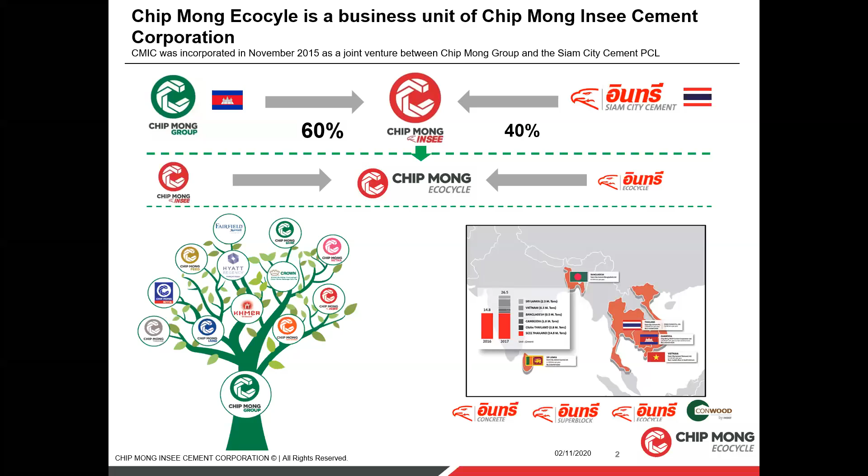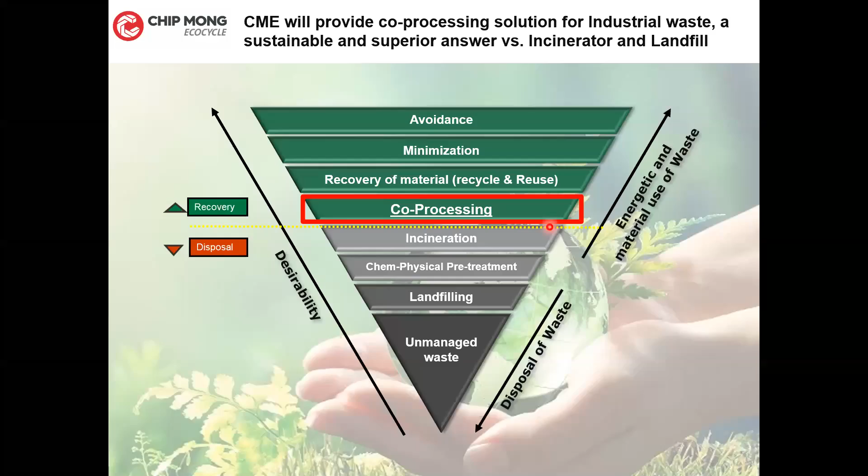Co-processing basically means we are doing two activities simultaneously without compromising either one. That means we are producing clinker, which is the semi-finished good of cement, and at the same time we are disposing of waste in parallel. That is called co-processing.

So the cement kiln is one of the perfect infrastructures to dispose of waste, even the most hazardous waste. Why? There are two main features of the cement kiln: one is temperature, the other is residence time.

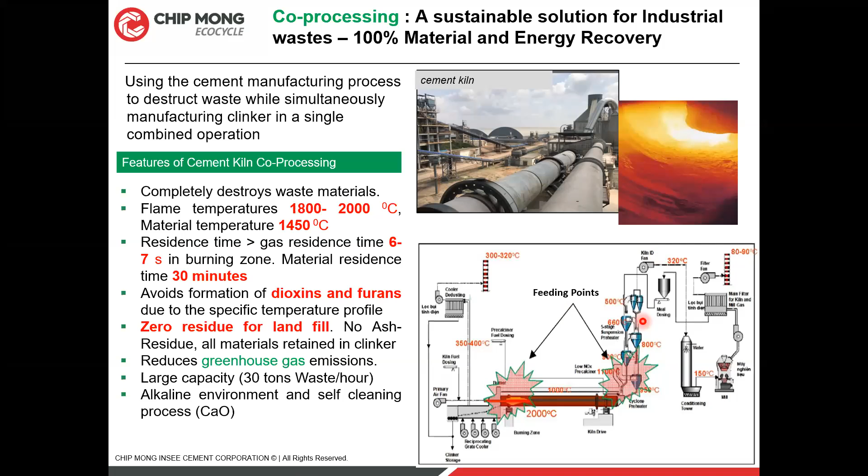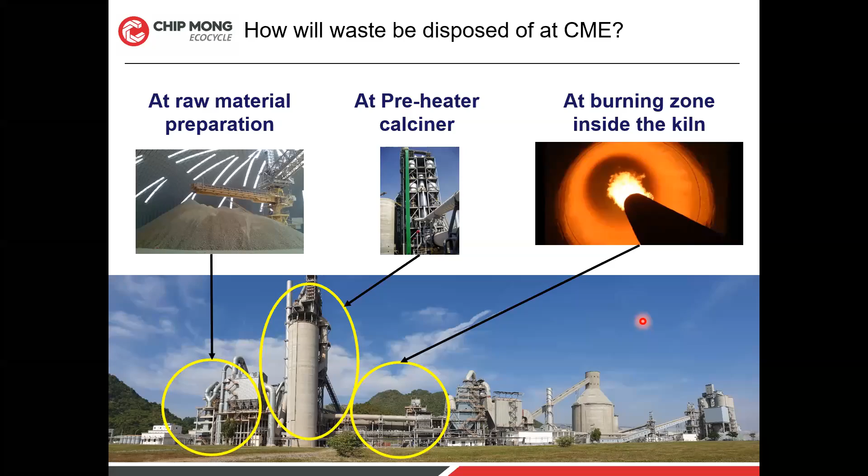At the same time, cement manufacturing process also should be there, because for our day-to-day life, cement is a necessary product. Therefore cement manufacturing also should continue. Apart from water, the second largest consumed material is concrete, in the world. So cement has to be there. And in the cement manufacturing process, there are also emissions going. So finally, cement will come.

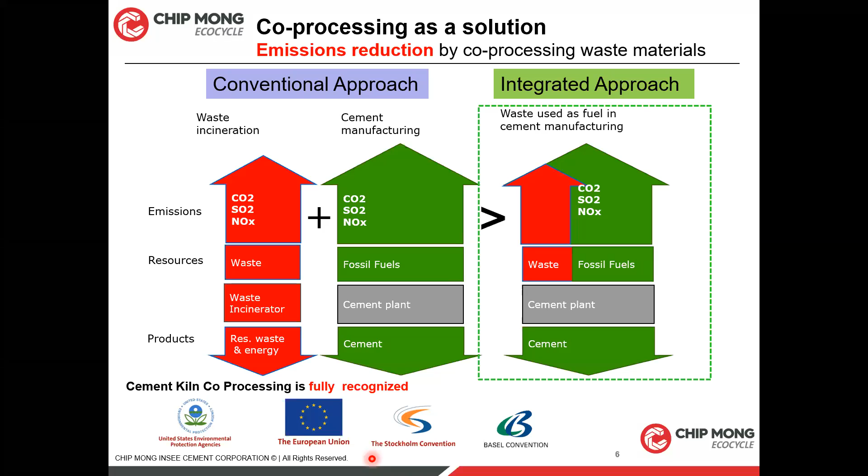So if you look at what waste we can co-process - at the moment we have capacity of 75,000 tons, which we are going to increase further in coming years to double these volumes. From non-hazardous waste to highly hazardous waste like PCB waste, we can dispose of it. That means if you give us industrial waste, 90% of it we can dispose through our solution.

Now let me explain - I remember in October 2019, Cambodia had their second waste summit where I presented our solution. At that time it was under construction. Then in December 2019, we implemented our solution, and within 10 months of operation, we accomplished a lot of things.

One thing is we started with biomass and things, and then within 1 month we started to give solutions for non-hazardous waste like garment waste. In Cambodia, 70% of industries are garment and footwear industry, so we started to dispose of garment and footwear waste.

At the same time, there was one of the main issues in Cambodia - basically there was no facility for the secured disposal of branded waste, like branded FMCG products, branded shoes, branded garments and things, which we are now giving the solution for.

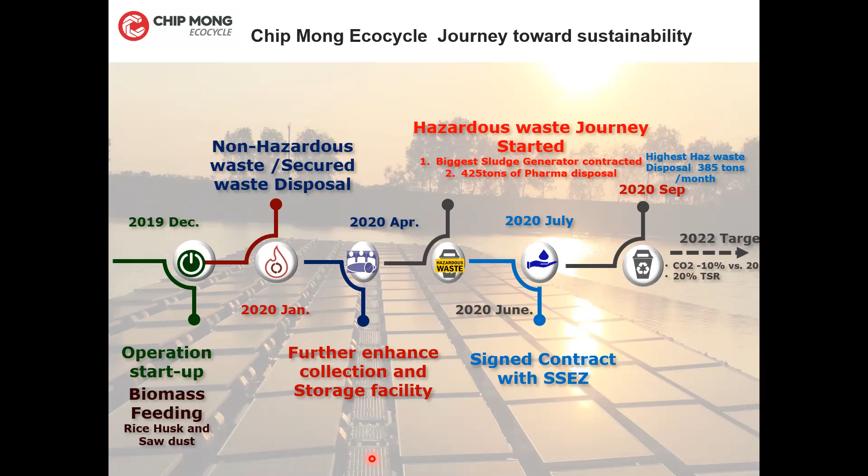As a result, we now have more than 30 factories working with us. We were able to replace fossil fuel by 10%, and 30,000 tons of waste have been disposed. At the same time, we have reduced 36,000 tons of carbon dioxide. For this particular 1.5 year period, we have invested more than 5 million only for the waste management business, apart from the infrastructure in the cement plant.

So that is about our journey, and I think that's about the Ecocycle. Thank you very much to the Congress for giving us this opportunity to show this successful business case.

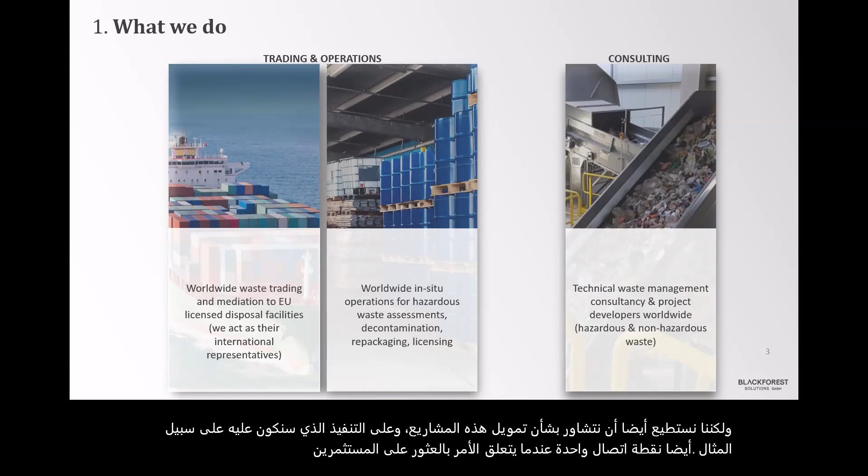And the second part is consulting, indeed, where we consult on a more technical level, technical waste management projects, but we also consult on financing these projects and on the implementation. We would be, for example, also one point of contact when it comes to finding investors, or when there are difficulties to implement concepts and strategies in countries.

When we talk about Germany, what is at the moment—this data is a little bit old, from 2014—but in Germany that has not changed too much. There's a bit of an increase of generation, but we speak roughly about 350 to 380 million tons of waste generated in Germany. Out of this 350 to 380 million tons, most of it, as you see, is the so-called C&D waste, which stands for construction and demolition waste. So only a rather small part is municipal waste, which you also know as household waste. We're talking about roughly 50 million tons.

In Germany we have rather high recycling. So the figures vary a bit, but we're speaking between 65 to 70% of recycling in Germany of household waste. The hazardous waste amounts to about 17 million tons in Germany.

And what we always like to say is, waste management in Germany is not just bringing or collecting waste in a bin and taking it with a compactor to a landfill, and that's it. It's a whole circular economy—I have to say industry, right? Because there are more than 270,000 people employed in waste management, in direct employment with waste management solutions. And the annual turnover in Germany for waste management companies is about 70 billion euros.

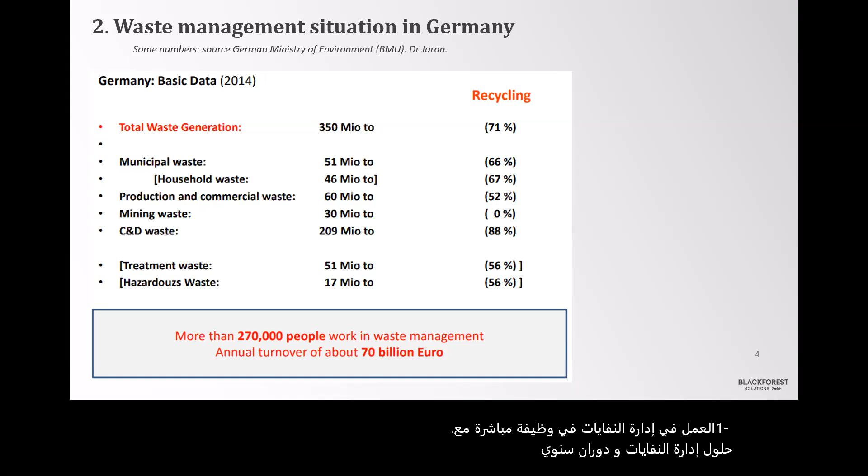When it comes to the different plants installed in Germany, we currently have 15,500 plants dedicated just to treatment. When it comes to waste to energy, it's worth highlighting that there are 161 classical waste incineration plants.

We have 687 waste-to-energy plants. When you look at the acronym MBT here, that stands for mechanical biological treatment, we have 55 plants. This is also related to Sajith's presentation before. In this MBT, so-called refuse-derived fuel is generated, which the cement industry can take, can buy in some cases, and use as an alternative to their primary fuel. Most cement kilns use fossil fuel as their main energy source, but it's very important to substitute these fossil fuels with alternative fuels.

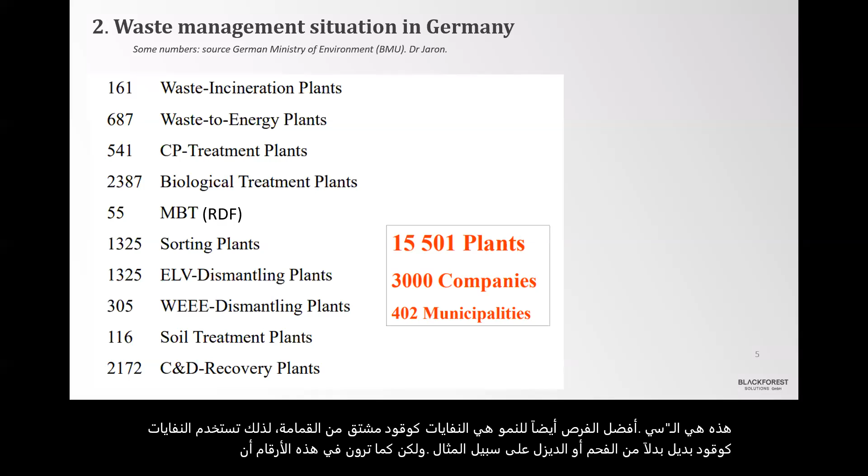And the one that has the best opportunities to grow is waste as a refuse-derived fuel—so waste used as an alternative fuel instead of, for example, coal or diesel. But you see also in these numbers that there's huge activity in Germany's circular economy and waste management.

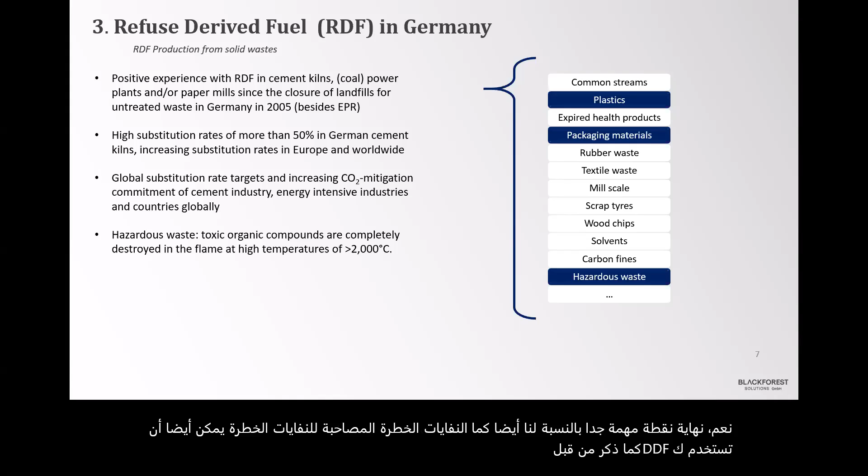And very important, hazardous waste can also be used as an RDF, as mentioned before by Sajith. So it's very pleasing to hear that now around 400 tons per month of hazardous waste is being treated in Cambodia in a cement kiln.

Why it's still challenging when we think about other waste to energy solutions: there are challenges when it comes to classical typical waste to energy facilities. One is that you always need a high calorific value of the waste. And if you just have a single bin with organic waste, like kitchen waste and food waste mixed in, then the calorific value decreases and makes it difficult to implement a waste to energy facility.

Normally you should have a small influence of the so-called informal sector, the waste pickers, but unfortunately or fortunately, depending on the perspective, in Southeast Asia you have a strong influence of the informal sector who is picking especially plastics and paper out of the waste. And this plastic is what normally contributes to the calorific value.

Also, when you operate waste to energy facilities, you need as an operator rather high so-called gate fees—this is the tipping fee that must be paid by the company that brings the waste to the facility. And also you have rather high capex, investment expenditures. Because of all these factors, especially waste to energy with grate firing—typical classical burning of waste—is rather difficult to implement for these reasons in some Asian regions.

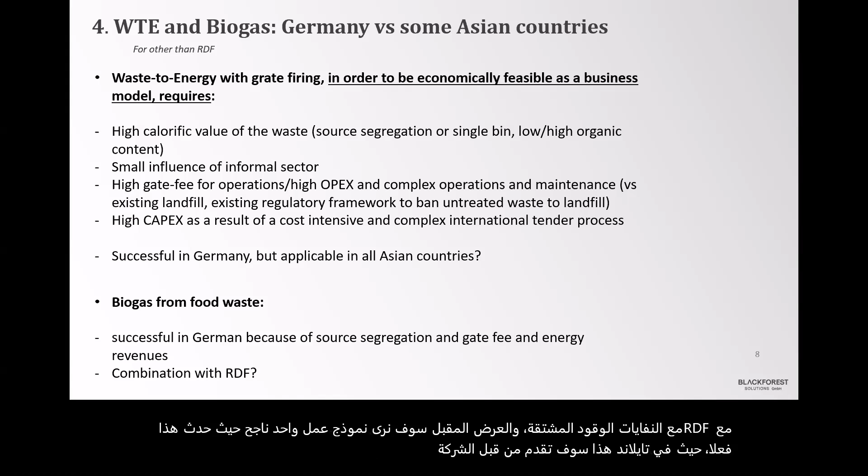And the same applies for biogas from food waste, with similar challenges for some Asian countries. The question is whether this can be properly combined with RDF, refuse-derived fuel. In the next presentation, we will see one successful business model where this actually happened in Thailand—presented by the company EUWELLE, showing a positive example of combining refuse-derived fuel with the huge amount of food waste we have, especially in Asian countries.

Here's a short overview of the actual business model of the most successful waste-to-energy technology and model in Germany, because we really think this one can also be implemented in Southeast Asia and Cambodia—not only for cement plants, but also for coal power plants. That would be very interesting for paper mills, or in general for all energy intensive industries.

But we need to be aware of the costs, and also we need to double check the revenues that are there. You see some pictures of RDF, how it actually looks like. There's pressed RDF on the left side of this picture, and the right side shows some fluff RDF, which is cheaper to generate.

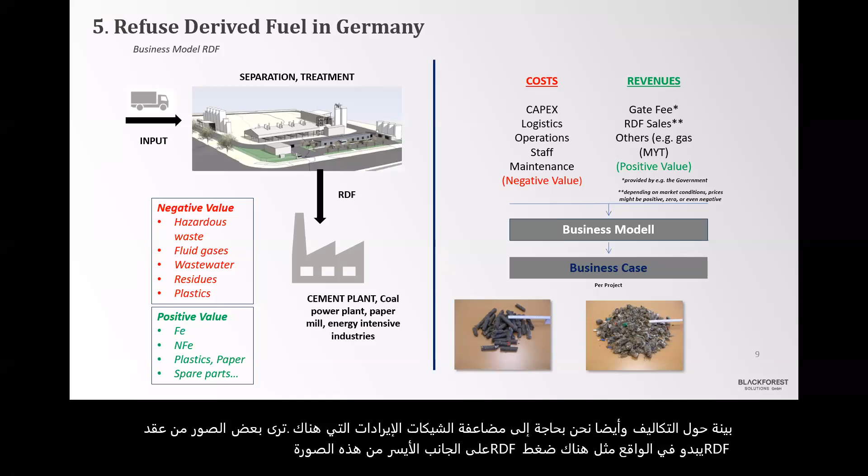The questions that need to be solved for RDF—and I think you would agree, Sajith, from the cement factory perspective—there are some uncertainties regarding supply and quality of RDF. A cement kiln actually produces cement as a product, right? It's not originally a waste treatment facility. It manufactures something with very specific acceptance criteria and quality expectations.

Waste does not always have this. How to solve the capex issue, how to mobilize investors. Logistics can be a big issue as well in certain areas. And not to forget what happens if we still have landfills. Whenever you have a landfill, it's always easier and cheaper just to dump waste, rather than using advanced technology.

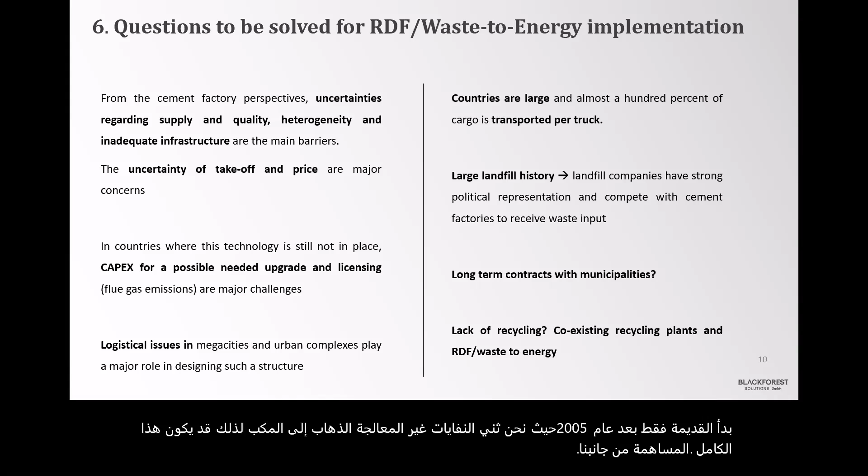And in Germany, it all started only after 2005, where we banned untreated waste going to landfill. So this may be the contribution from our side for the time being, and also looking forward to a dialogue, not even today, but for the whole week of the Cambodian Waste Summit. Thank you very much, Sebastian, for a very interesting presentation.

I think we can move directly to the next point. So I think we were going to have a video, is it Marc? Is it you going to show the video, or is it somebody else who controls this? It's me. First of all, hello. I just wanted to say that I'm showing the video at the end because I want to explain the technology first, and then give a virtual plant visit at the end, which makes it way easier to understand. I think that's a good ending point.

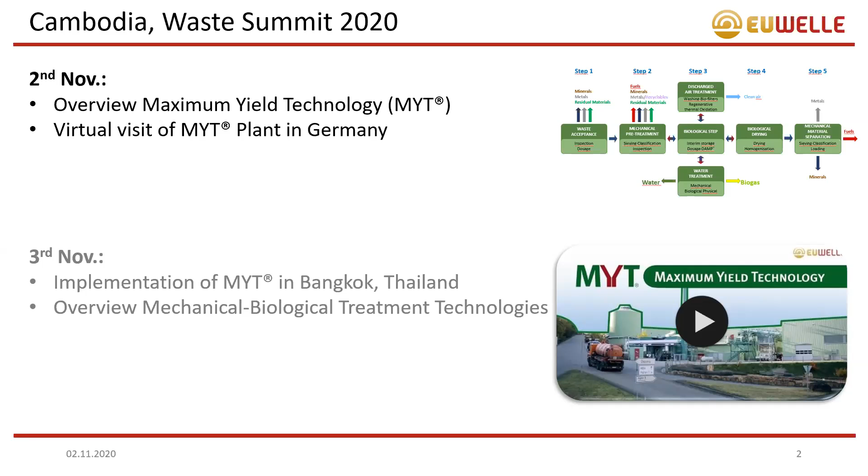So just a background of the MYT technology in Germany. The plant serves the waste from around 600,000 residents in Germany, which produce 100 kilotons a year, just to have an impression of the capacity. The operator is called ZAK, the Special Purpose Association, and the MYT business unit is responsible for the know-how transfer, and we as EUWELLE are also working for the MYT business unit, just to understand the connections here.

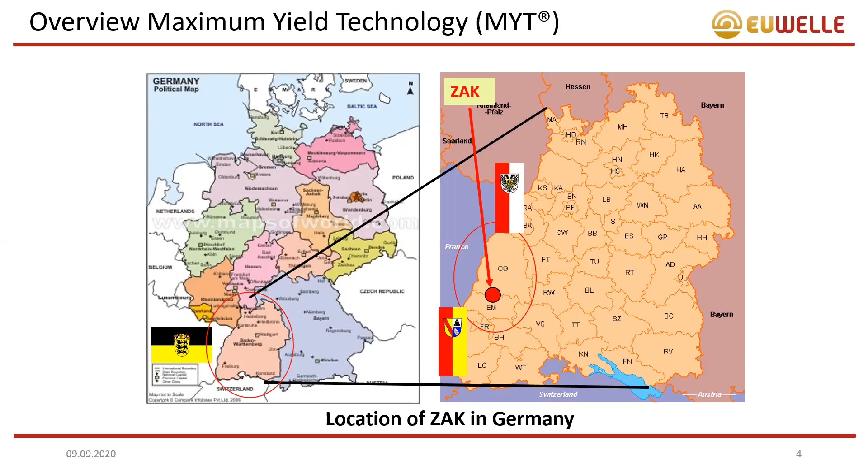The location in Germany is here in the southwest of Germany, close to the French border. So we are also serving some amounts of French waste, which is overproducing in France. As Sajith already showed, here is the well-known waste hierarchy, with the least preferred technology of landfills, sanitary or unsanitary, then energy recovery only, without material recovery, and at least for the organic waste hierarchy, here we have anaerobic digestion with biogas production and RDF production. This is in this hierarchy the best preferable.

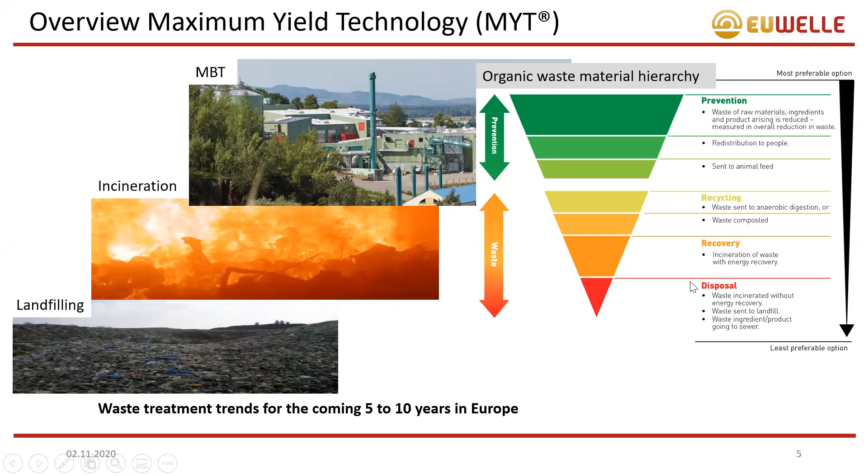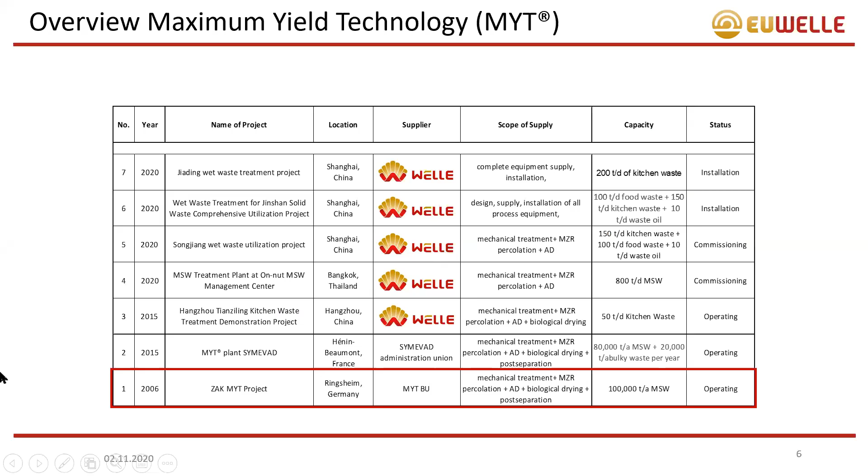The plant I will talk about today is the first maximum yield technology plant. It was built in 2006 and has been running since without any unplanned downtime. So this is 14 years of perfectly running technology. And tomorrow we will talk about the fourth plant, which is built by our mother company, and it has the same capacity as the plant I'm talking about today.

So here you see a top view of the area of the MYT plant, and just to give you an orientation, the municipal solid waste here is collected without separated collection of organic waste. So this is a special case here in Germany.

Usually you have separation at source. Germany is like world champion in waste separation, but here we don't need that, because our technology aims also on the production of biogas. So we need a high load in organics here, which makes it way easier also for the municipalities, because they have less logistics and hence also less costs.

So the waste arrives here in the arrival hall, called Hall 1, and is then shredded and put here into the mechanical pre-treatment hall. Here it is sieved, and the plastics, so the high load plastics, and the organics, which are the smaller particles, are separated by sieving, mechanically.

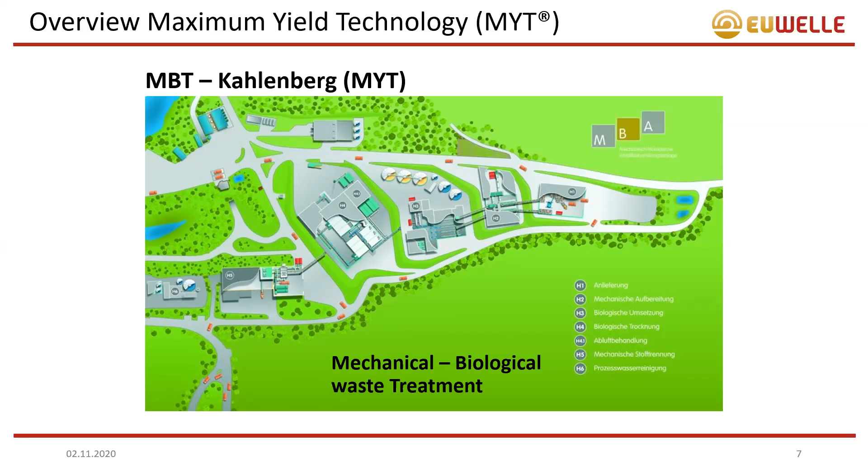So here is still a bit of organics in there, but also lots of high calorific particles, like small plastic fractions and particles. And here it is biologically dried, which increases the calorific value, and this can then also be sold as RDF, or with further treatment, it is also possible to gain soil improver or compost.

These are the 5 steps. These will be explained in detail in the video which I will show you. It's just important to know that here in Germany, it's like the full spectrum of what is possible here, for best quality of RDF and biogas. Tomorrow I will show you, because the conditions are different, and also the requests of our client are different. We were able to leave out step 4 and step 5 in Bangkok. So this is not just a strict construction which only works like this. This is pretty variable depending on clients' demands.

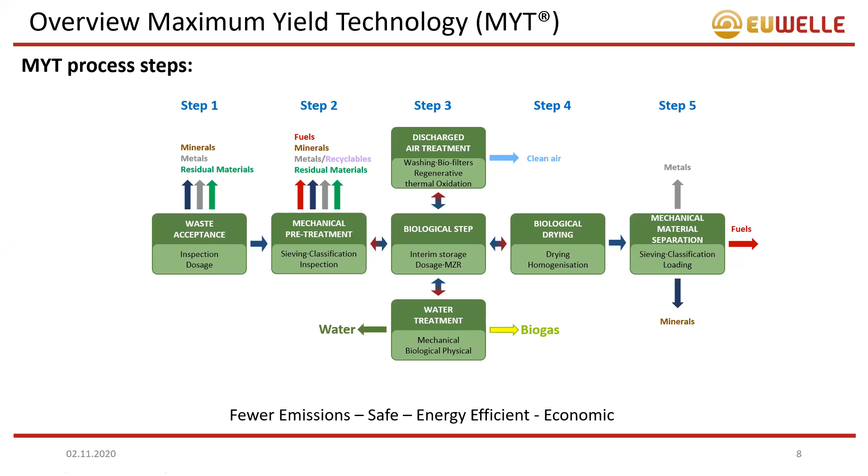The special part is the so-called multiple zone reactor, because here the organic fraction, the high organic fraction, is put into the reactor and then mixed together with process water. There is a ratio of between 1 to 2 cubic meters per ton of input. Water is percolated into it, and within the retention time of 2 to 3 days, there is a hydrolysis occurring, which makes the organic fraction water soluble, and it's like a first step of digestion, that it breaks down the organics into organic acids.

Which are water soluble, and then we put it into the anaerobic digestion tanks. So this is AD, and it's way more efficient to make it like this, to separate the solids and the organics into the liquid way, and the space time yield is higher than here.

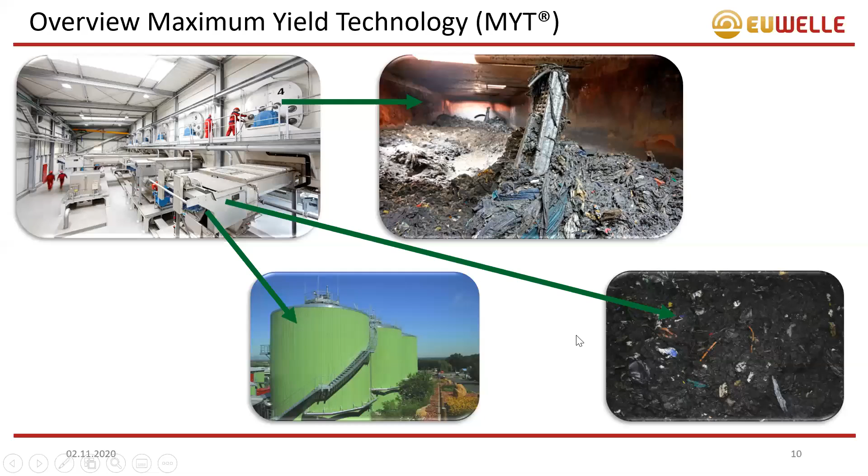Which can be then, and this looks then like this. You see these are pretty large boxes here, and with a time of 10 days, they then have to get specific requirements which are demanded by, for example, cement industry or paper industry, which need a good flowing material to use it for their incinerators.

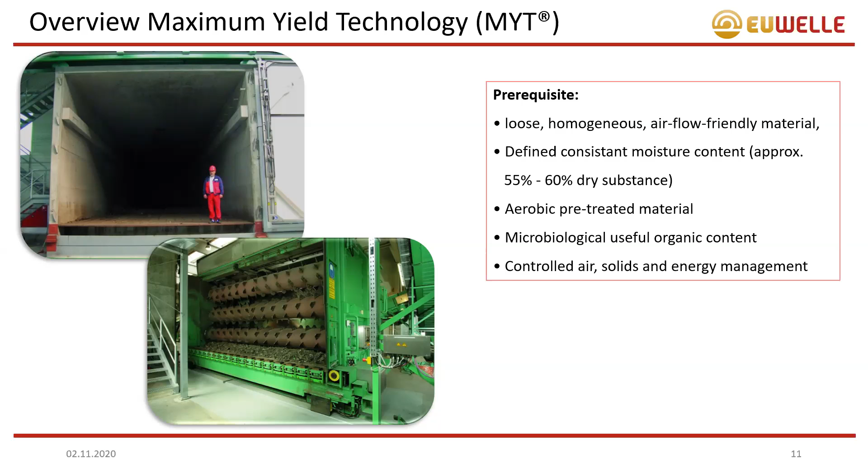As Sebastian and Sajith already said, RDF is of high importance, especially for cement industry, because you use everything, so the thermal energy and the material. So it's depending on definition, material recovery. And here we made a comparison with our RDF.

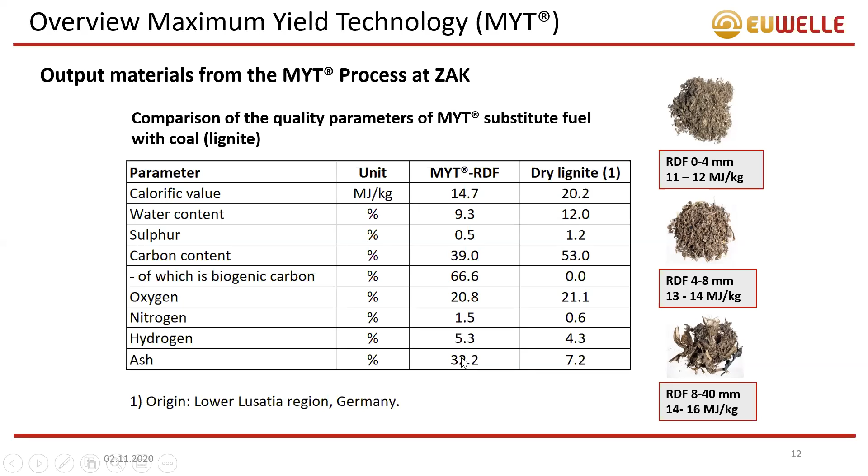So this is the average of our three qualities, which is then here, paired it with coal, so with lignite, not hard coal. And you can see we are pretty comparable with all of our values, except biogenic carbon, because we are obviously here high in organics, and the ash content. We have here a higher ash content, but this more or less negative value is not as important for the cement industry, because they build in all the material. So I hope you can say it too, Sajith, that this is more or less neglected for the cement industry.

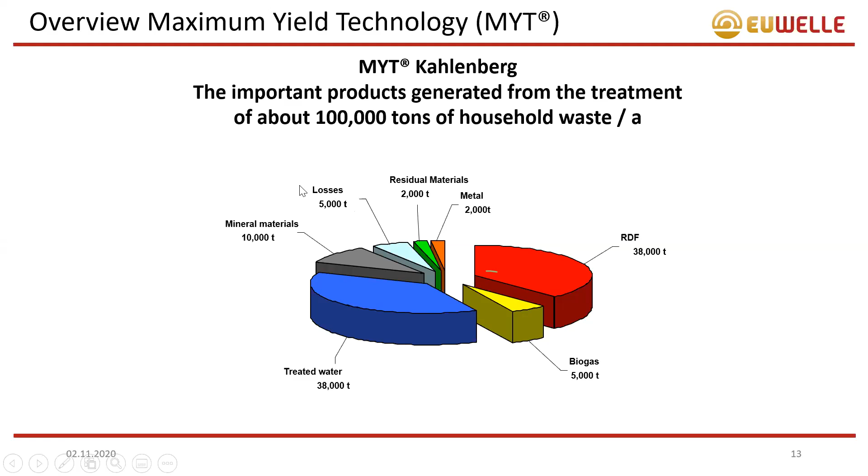For a mass balance of our methodology, from 100,000 tons per year, we produce 38% of RDF—high, middle, and low calorific RDF. We produce 5,000 tons of biogas. We also have a lot of processed water, which is treated biologically in our facility. Then we have mineral materials, which are sent back to landfill because they are inert, or used for street construction. We also have metals, which are sold, plus a few losses and residual materials. So you see, we achieve a usage rate of over 90%, 90 to 95%, from the waste.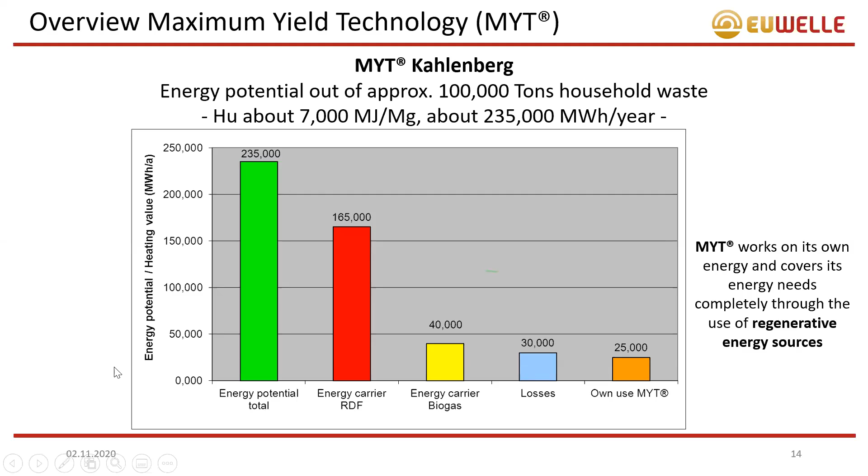And like this, we are decreasing the CO2 production in all of our clients' plants—cement plants, as already mentioned, because RDF is a substitute for fossil fuels, and also with the methane, so fossil methane substitutes, and also paper plants, and every industry that is high demanding in energy.

As a summary, the MYT technology—maximum yield technology—is effective for the reduction of waste amount to be landfilled, because we're reducing the amount by up to 95%. It is a prevention of landfill gas, because we are producing the methane, the biogas, in controlled conditions, and collecting it, then using it via CHP and power plant, or directly feeding it into the local grid. And like this, it's both ecologically and economically sound.

So this plant in Germany really gives gains—sorry—it keeps itself alive financially, so you get revenues from it.

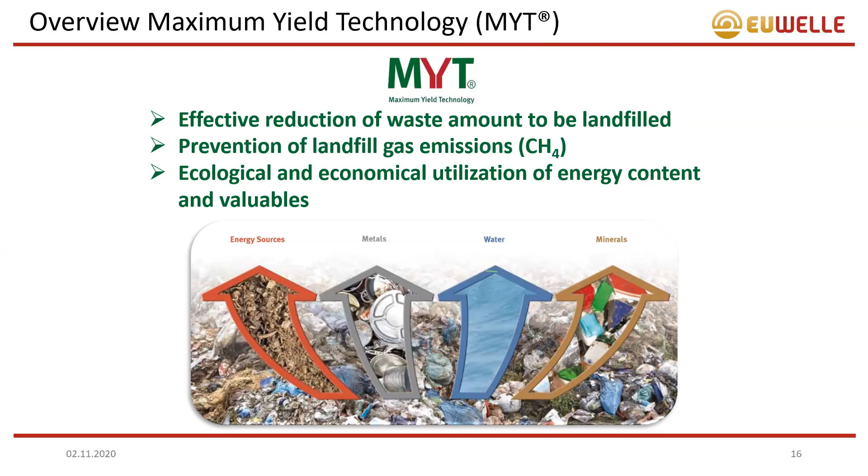So this was the theory behind it, and I just want to, so that you can better imagine what products are there and how the products look like, show you a video which is also available.

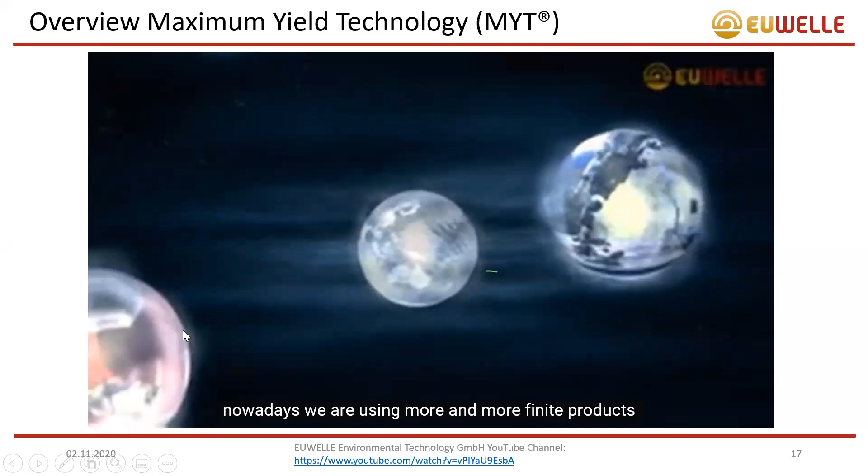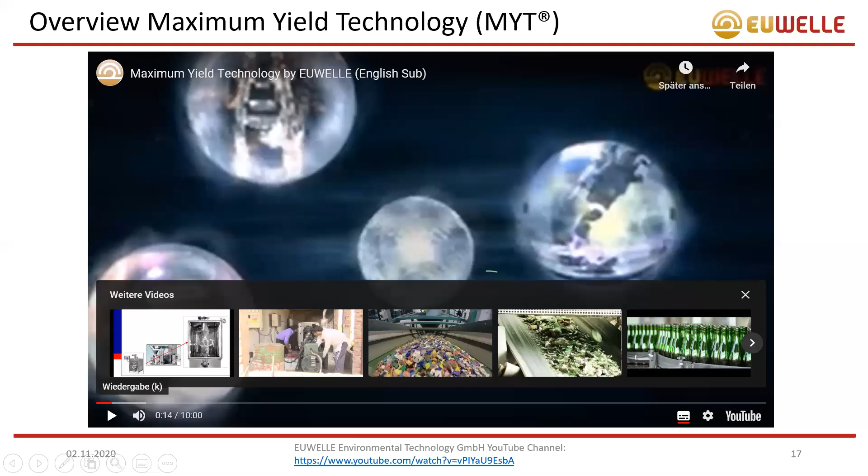Nowadays, we're using more and more finite products as raw materials for production and energy supply. These products can also be found in, of all places, our rubbish.

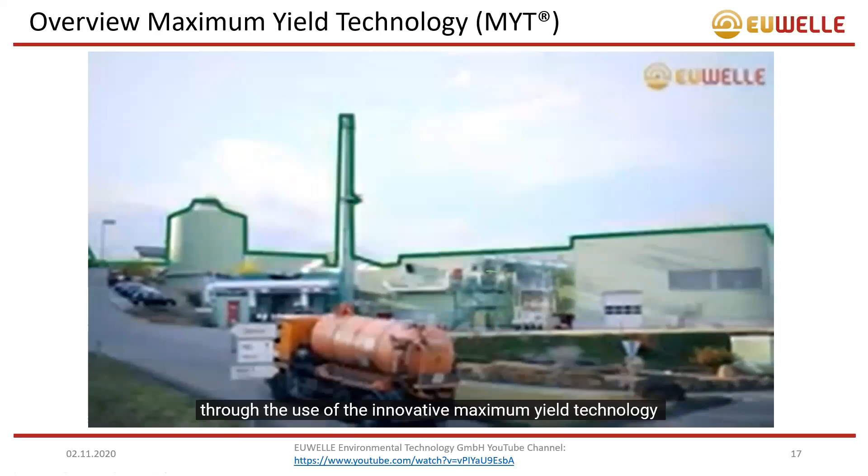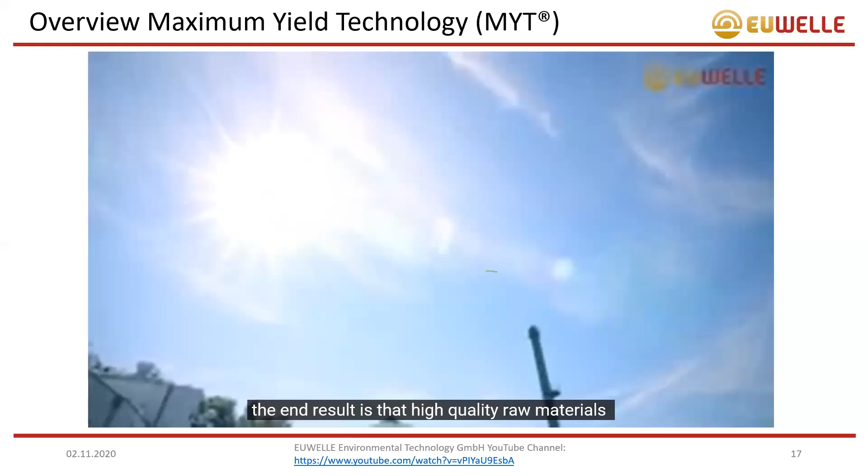The Kahlenberg Waste Treatment Association, ZAK for short, has managed to use waste as a resource and to extract the maximum energy potential and raw material from household waste. Through the use of the innovative maximum yield technology, the association's mechanical biological waste treatment facility works reliably, is self-sufficient in terms of energy use, and has almost no emissions. The end result is that high-quality raw materials and energy sources are generated in the form of economically useful products from over 100,000 tons of waste each year, thereby making an important contribution to the conservation of resources and the prevention of climate change. MYT consists of 5 tried and tested, perfectly synchronized process steps.

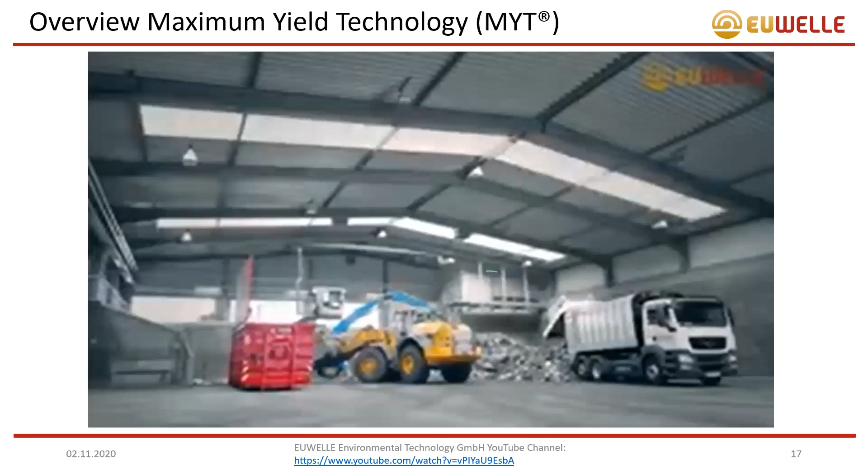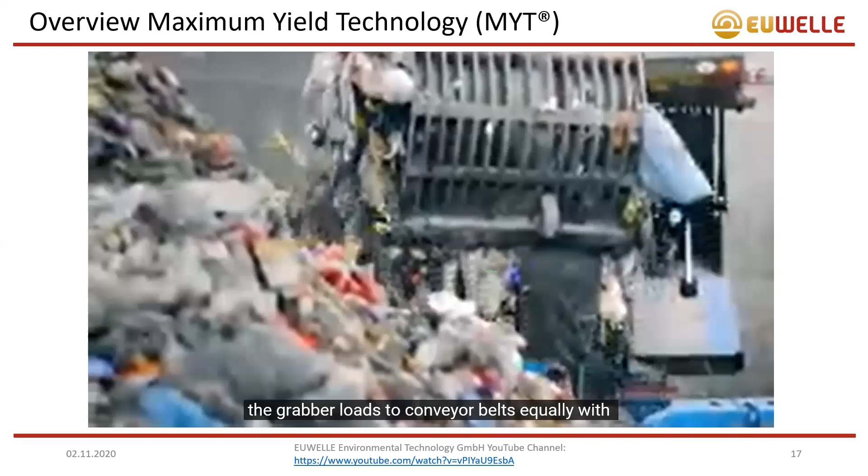The first step is the intake of waste, at the delivery hall. This is where the waste begins its journey through the MYT facility, and the last point at which it can be plainly seen. The grabber loads 2 conveyor belts equally with the waste that's been delivered and sorts out large impurities and recyclable waste.

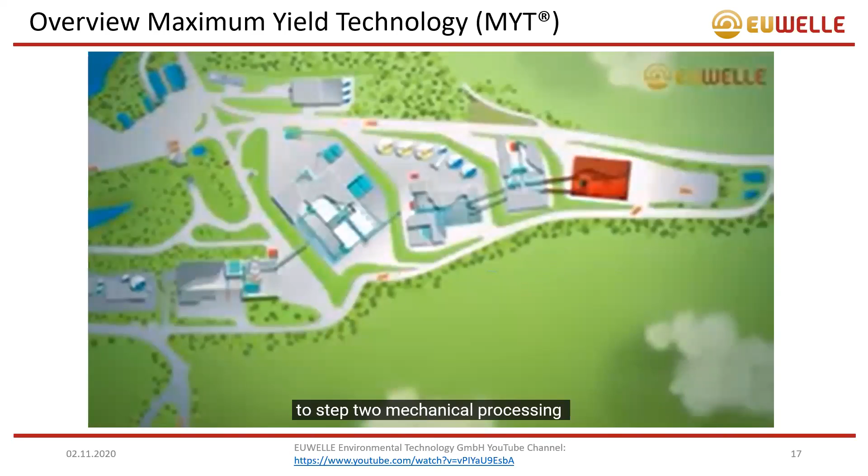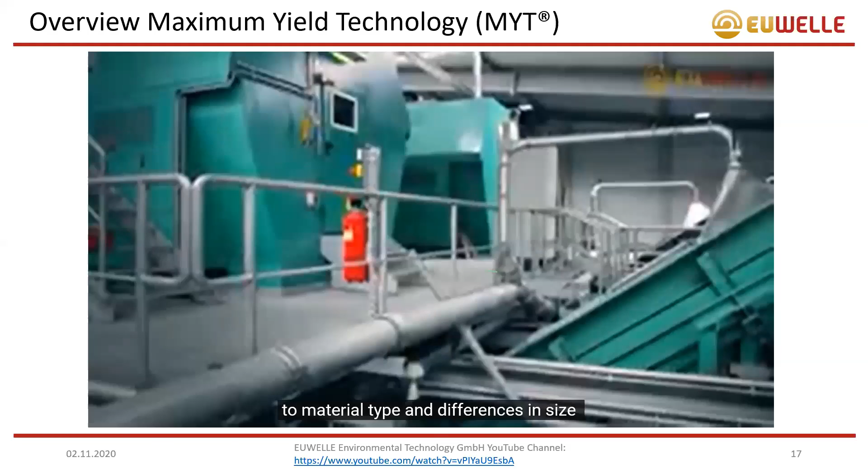The checked waste then proceeds in metered quantities to step 2, mechanical processing. Here, the waste is automatically separated according to material type and differences in size. The concepts and systems used are based on ZAK's many years of experience and guarantee safe operation and the systematic separation of fuels, minerals, metals, and a small amount of non-recyclable residual waste.

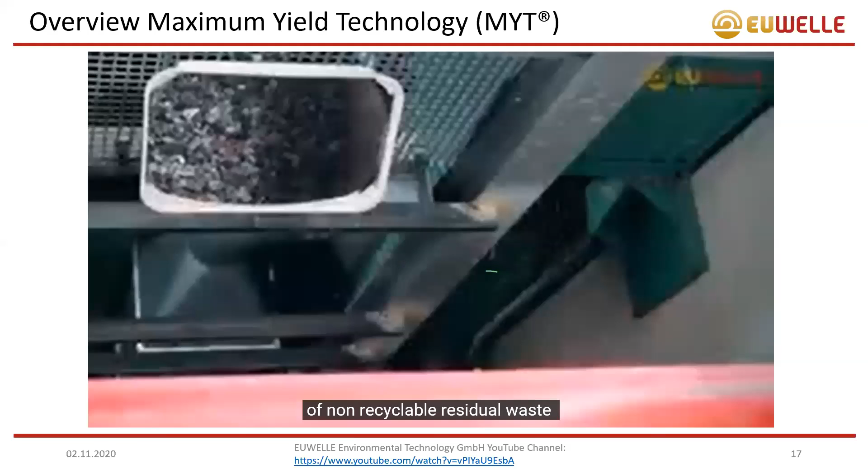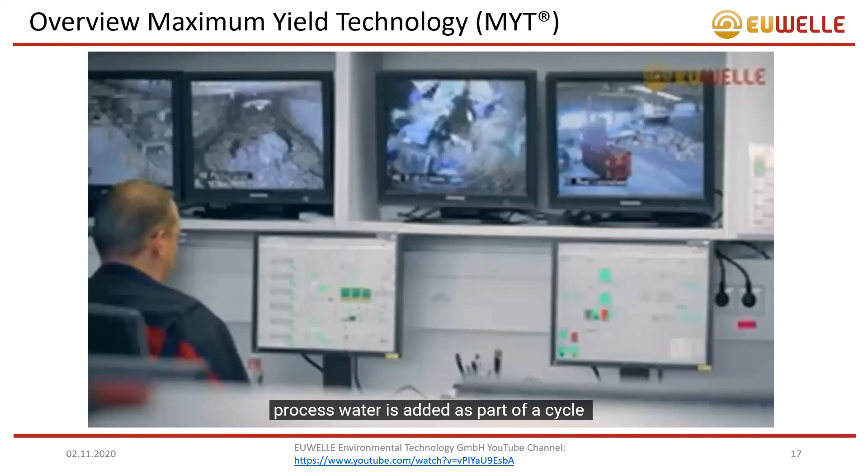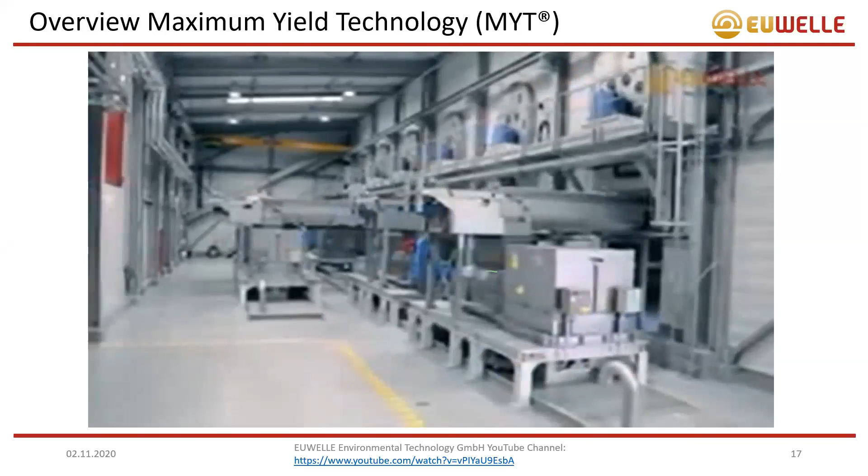The checked and processed waste then proceeds to the third step of the process, the biological stage. In the intensively tested multiple zone reactor, MZR for short, the waste is selectively reduced in size and homogenized using a horizontal agitator. Process water is added as part of a cycle, ensuring appropriate, unchanging consistency. After being in the mixer for a short period of time, presses are used to separate water from solids. A portion of the microbially assimilable organic material is washed out with the resulting press water, then purified several times and used to generate energy.

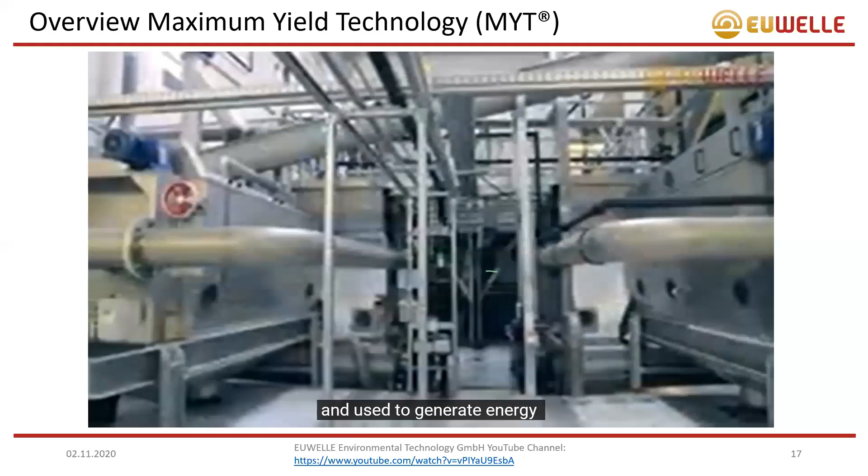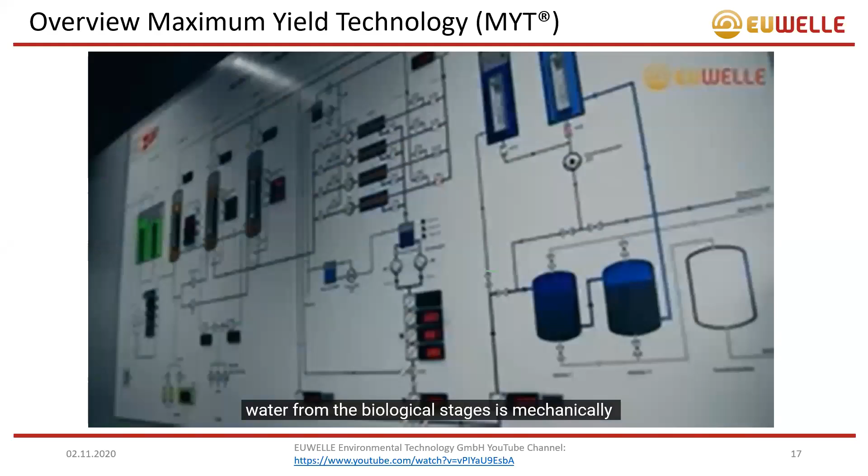The water treatment: MYT incorporates a practice-proven and mature water treatment process. The process water from the biological stages is mechanically and physically processed to separate coarse and fibrous materials.

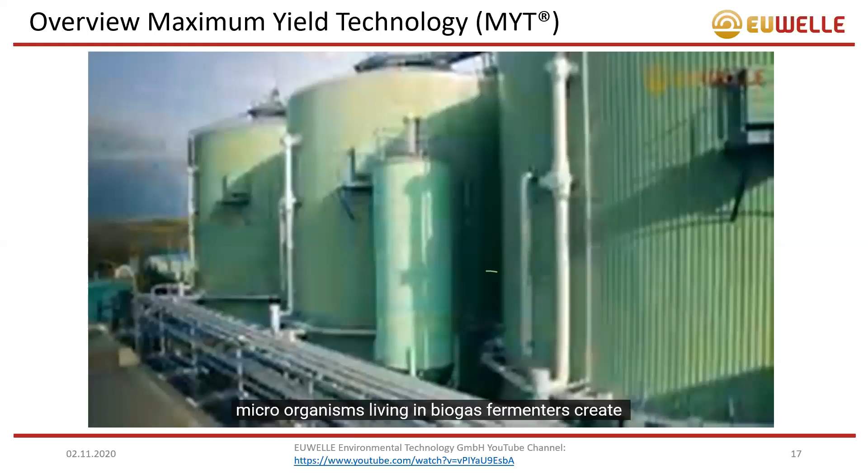Microorganisms living in biogas fermenters create biogas from organic compounds. This biogas is then used in the nearby cogeneration unit to generate electricity and hot water for the local district heating network. In the process, more electricity and heat is produced every year than the entire mechanical biological waste treatment facility itself needs.

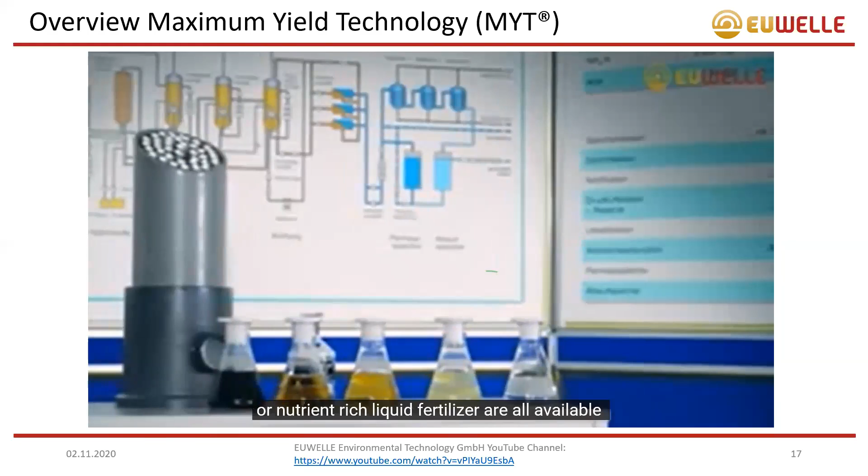At the end of the water treatment process, purified water, water for agricultural irrigation purposes, or nutrient-rich liquid fertilizer are all available. In addition to water management, the ZAK also sets new standards in exhaust air purification.

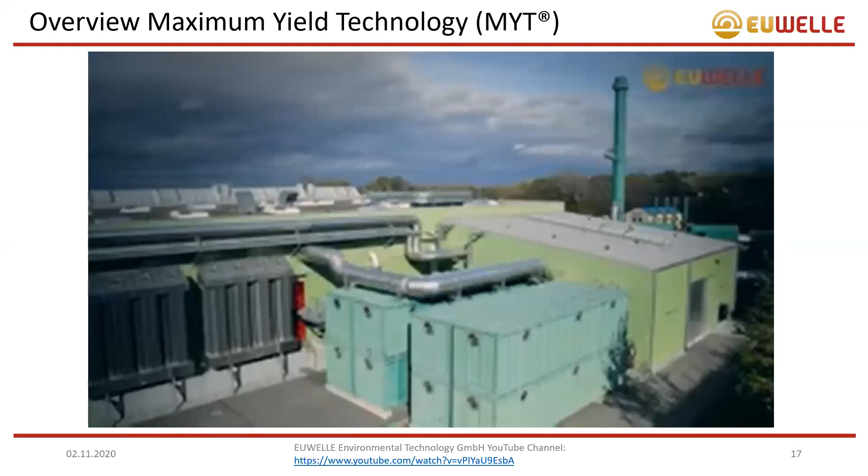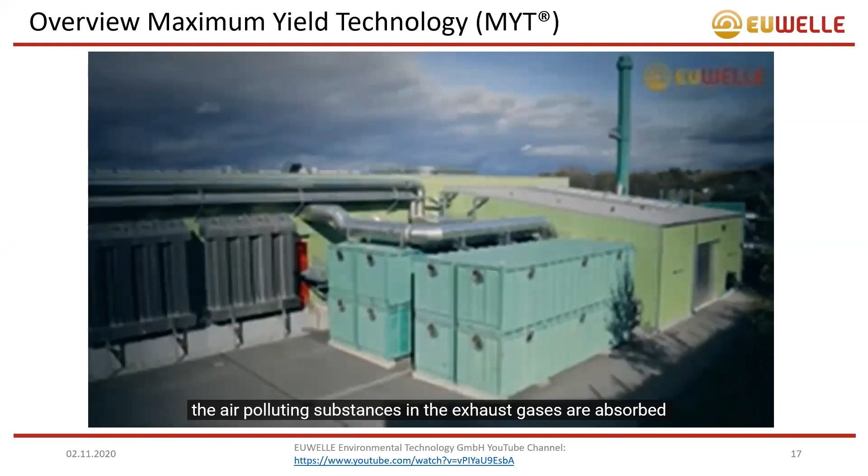Biofilters are containers filled with natural substances, such as bark mulch. The microorganisms in the biofilter reside on the biofilter material. The polluting substances in the exhaust gases are absorbed by the microorganisms and are then broken down biologically into carbon dioxide and water vapor.

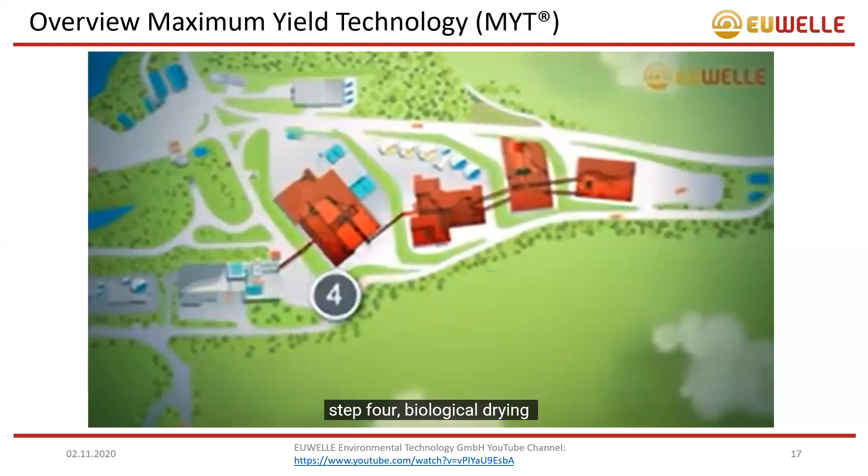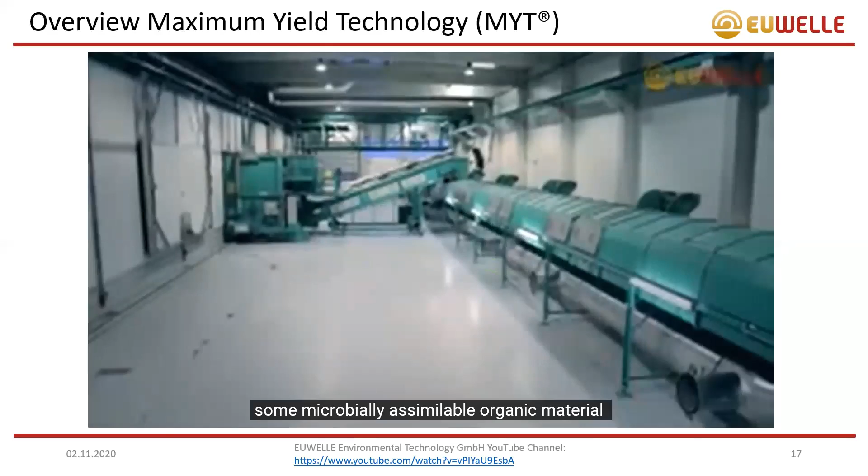Step 4: Biological drying. After the separation of water from solid just completed, some microbially assimilable organic material remains in the solid material, thereby allowing biological drying to take place that is both energy-saving and economical.

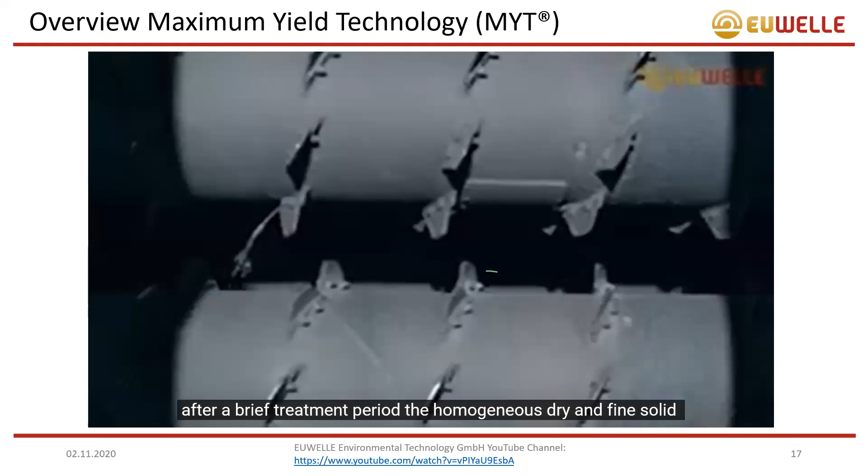In tightly sealed concrete tunnels, air passes steadily through the waste, providing the microorganisms with oxygen. These microorganisms feed on the material's organic components and produce heat energy for drying. After a brief treatment period, the homogeneous dry and fine solid material is available, which can subsequently be easily broken down into its constituent components.

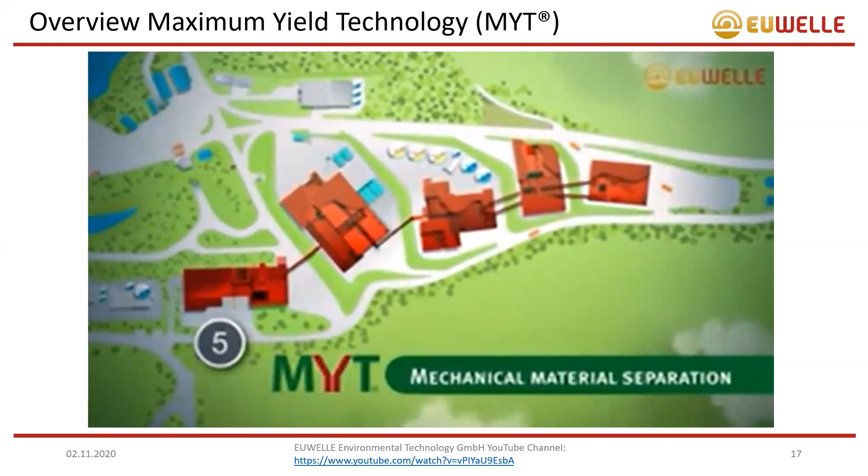Step 5: Mechanical material separation. Screening and sifting systems then break down the material from the biological drying process.

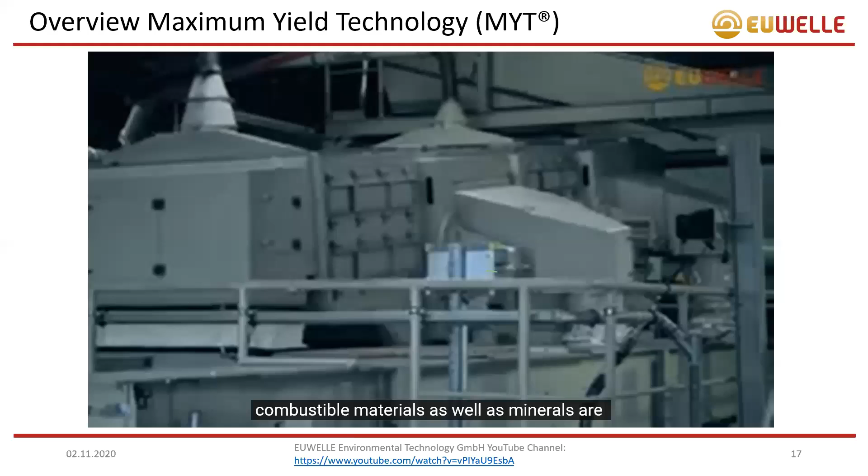Energy-rich combustible materials, as well as minerals, are transported through special conveying systems to the loading stations and can be dispatched without requiring any further treatment. The goal has, at this step, been achieved.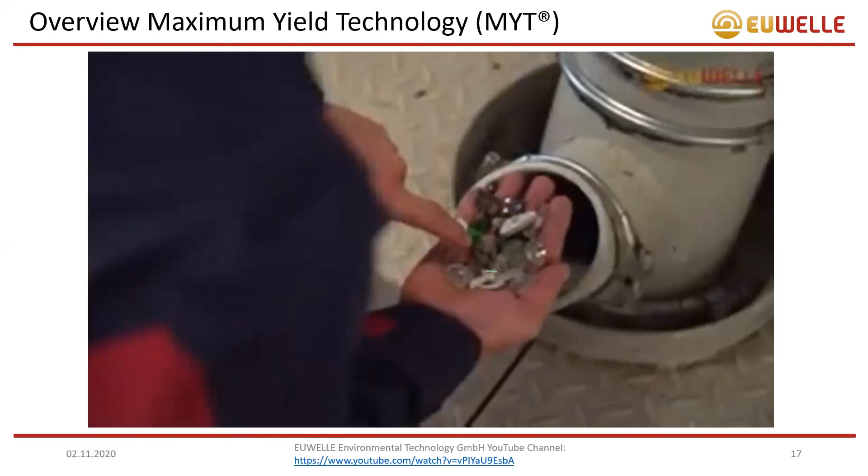Economically utilizable raw materials and high-quality substitute fuels are obtained from waste material in industrial processes, which can be used to replace fossil fuels like coal and crude oil.

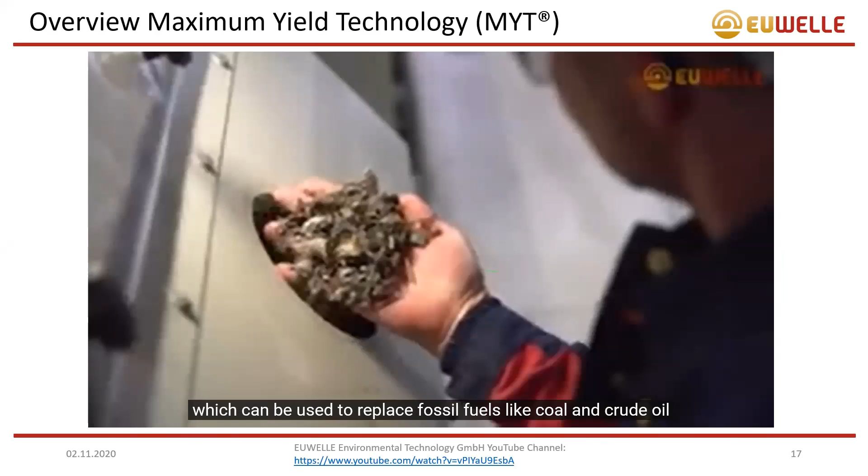The high quality, energy-rich substitute fuels can then be used in industrial coal-fired power stations to generate electrical and thermal energy.

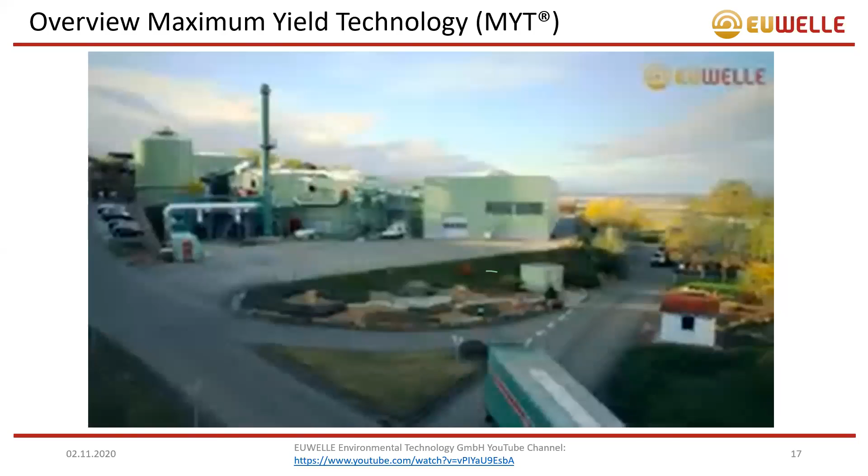In the nearby combined heat plant in Pforzheim, Germany, up to 20,000 tons of hard coal, or about a quarter of the plant's requirements, could be replaced by substitute fuels, which equals approximately 5 megawatts.

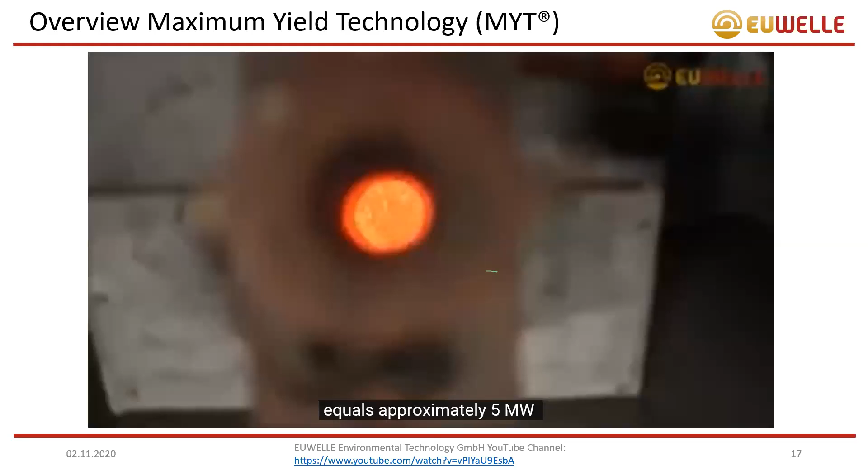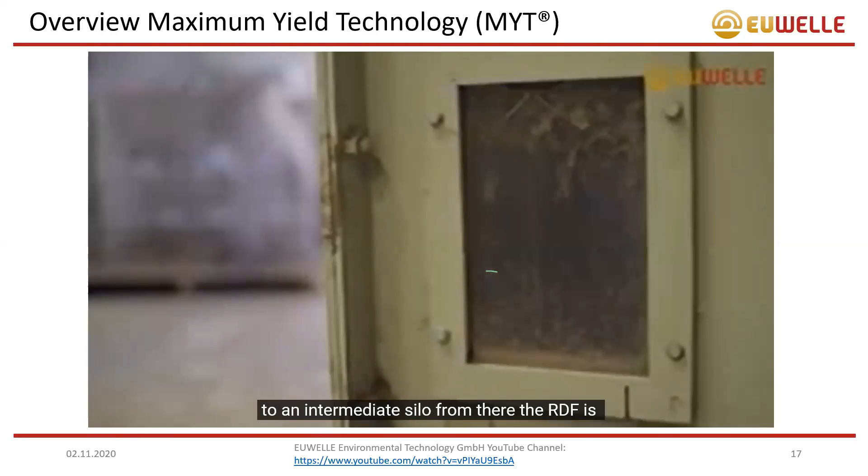Another customer for the substitute fuel produced is a regional paper manufacturer. At the truck docking station, the material is transported via screw conveyors and conveyor chains to intermediate storage. From there, the RDF is transported pneumatically and blown into the combustion chamber of the circulating fluidized bed boiler.

The household waste sourced RDF substitutes imported natural gas, oil, or coal.

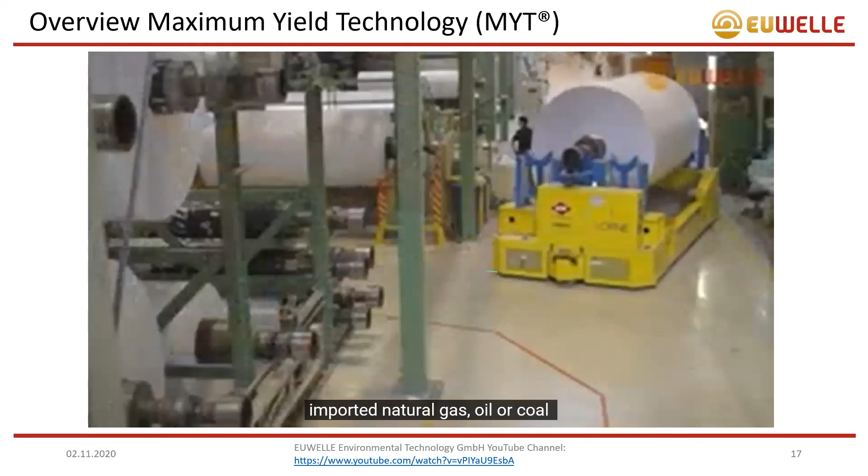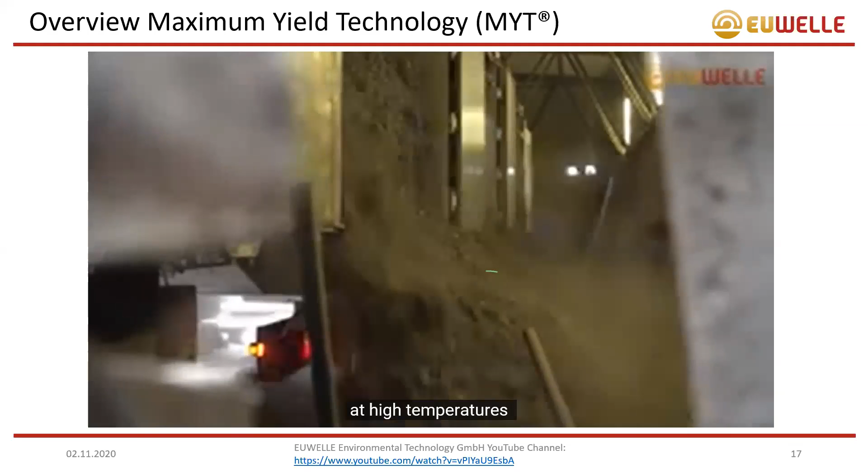In a rotary kiln of a major cement manufacturer, the RDF produced by the MYT plant is burned at high temperatures between 1500 and 2000 degrees Celsius at the flame, thus achieving complete destruction of organic matter. The residence time of the fuel in the furnace is longer than 2 seconds, and therefore in full compliance with current legislation.

Neutralization of the acidic gases of the fuel is achieved by passing the gases on over quicklime in the kiln. Emissions at the chimney are continuously monitored by devices connected to a computer system and are communicated quarterly to the appropriate environmental control agency.

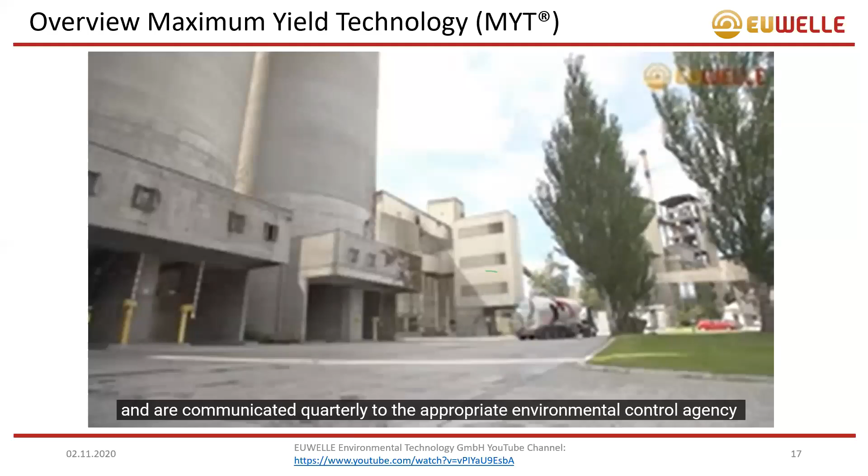The fuels produced from waste conserve resources and reduce carbon dioxide emissions, which is good news for the environment.

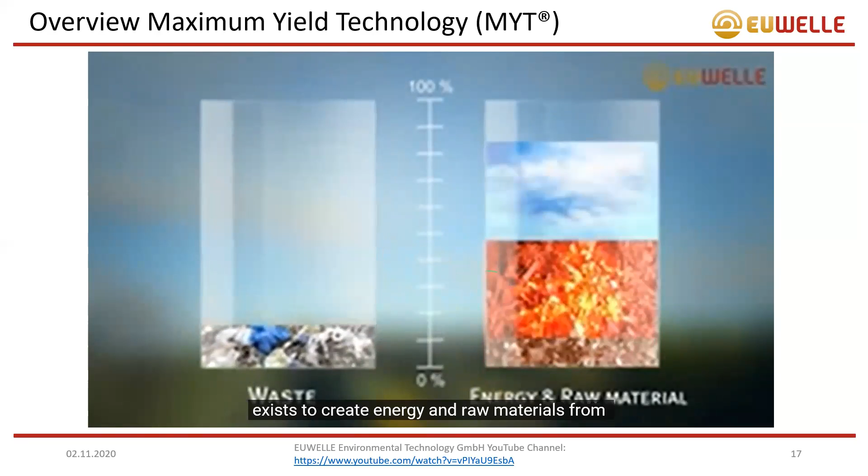The products created by the MYT process clearly illustrate the great potential that exists to create energy and raw materials from household waste with minimum impact on the environment. In addition, dependence on oil, gas, and coal imports is minimized, and a positive contribution is made in the effort to prevent climate change. See for yourself by visiting the ZAK in Ringsheim.

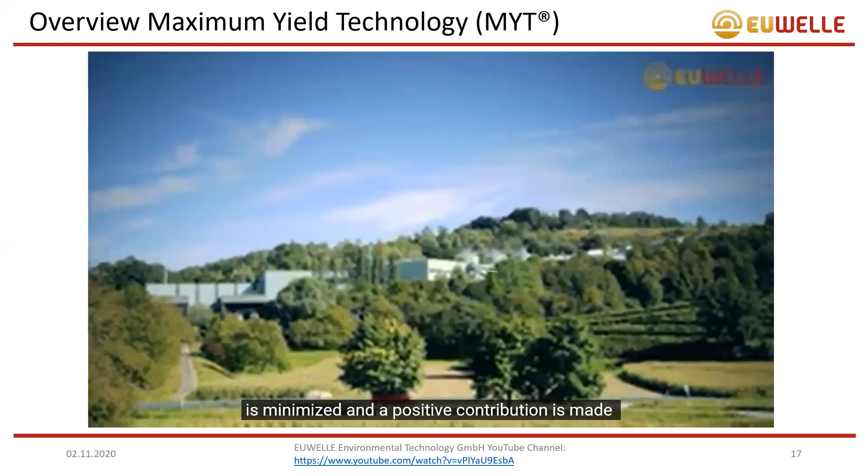MYT can be seen up close by the people and is waiting to be explored and marveled at. The facility is situated amidst nature.

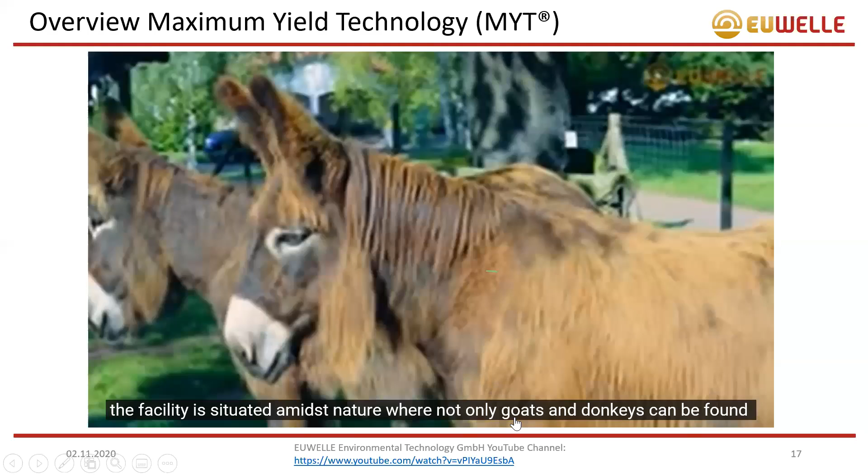Situated amidst nature. Thank you very much, Marc, for that very extensive presentation. And the quality of the video actually served the purpose very well.

Okay, good. Yeah, because I already had the experience that when you use higher quality, then the other persons only see it like stop motion.